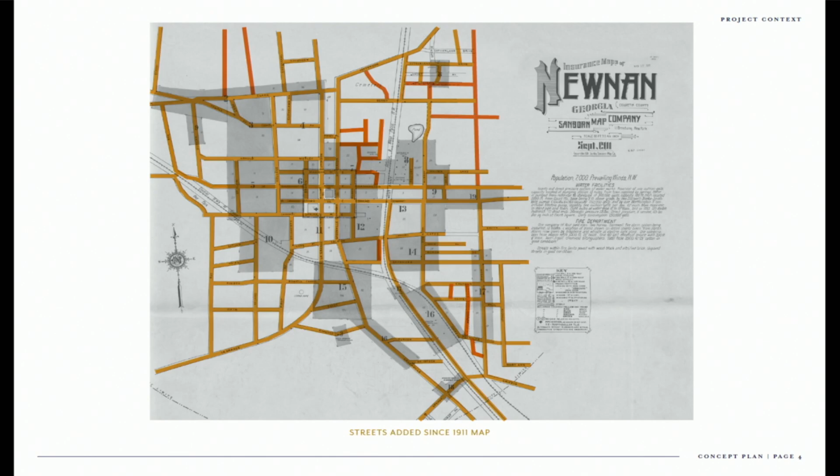Since then, we've only added a few small streets in this same district. So if I go back and forth, you can see the added darker orange color in these areas. And that's partly due to land becoming more available, or some industrial land that was then turned over to some residential streets and the like. But that growth happened in smaller block forms, as you can see, versus the larger blocks that were there previously.

So why are smaller blocks better? Why are streets good for cities? We went over this with the public on the 18th of June. Streets and blocks create more efficient network for vehicles and pedestrians to move around. They give you more route options so that it helps to distribute traffic around town. There's more on-street parking. You all have a pattern of diagonal parking on your streets, which adds a lot of parking capability to your streets, taking that pressure off of the blocks in the private development.

And there's more access to private property, a very clear reason to have public right-of-way, which then creates value for that land. The more street frontage we have, the more front yards, the more front doors, and the more street fronts that we can have and provide to property owners, which means that there's more opportunity to create development, whether that's an ice cream shop or a hair salon or whatnot. Those are all great benefits to the city.

And all of this results in what I think the goal is for you as council members, is to create a place of density, a city that feels like it's got a strong identity, and reducing the amount of sprawl outside of the city limits.

Part of our research involved looking back through some of your past documents, planning documents. One that resonated a lot with us was this report from 2014, which was the Livable Centers Initiative report. This was won by a grant by the city, and this planning group came in and did this whole analysis and then created a vision plan for the city, specifically focused in the area encircled in that kind of gray dotted line. So essentially, the core of downtown, the 9-block square, and to the east. Knowing we all know that to the west is a pretty substantial single-family fabric and pretty intact.

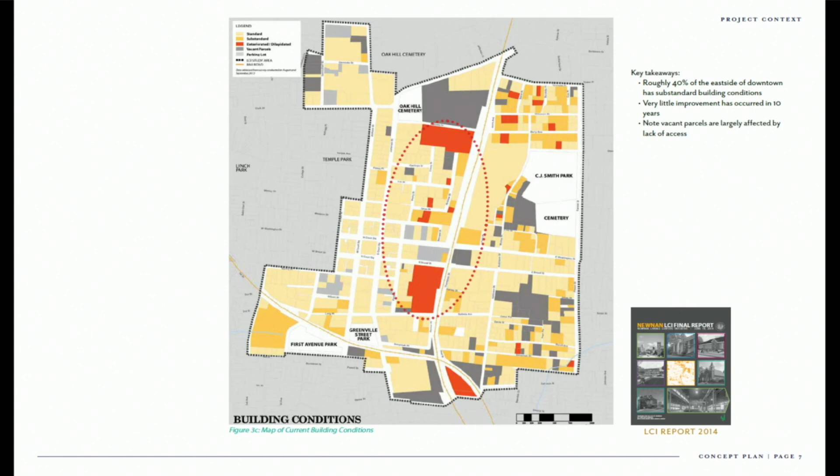Going back from 2014 to today, it's not a whole lot different, although we do know there are two new owners now for those large red parcels.

Similarly, pedestrian facilities, specifically sidewalks, are almost non-existent on the eastern side, definitely in our district. Those red lines are non-existent sidewalks, and the blue are sidewalks that are sufficient. So all the more important to create connected streets so that we can create connected sidewalks leading to downtown.

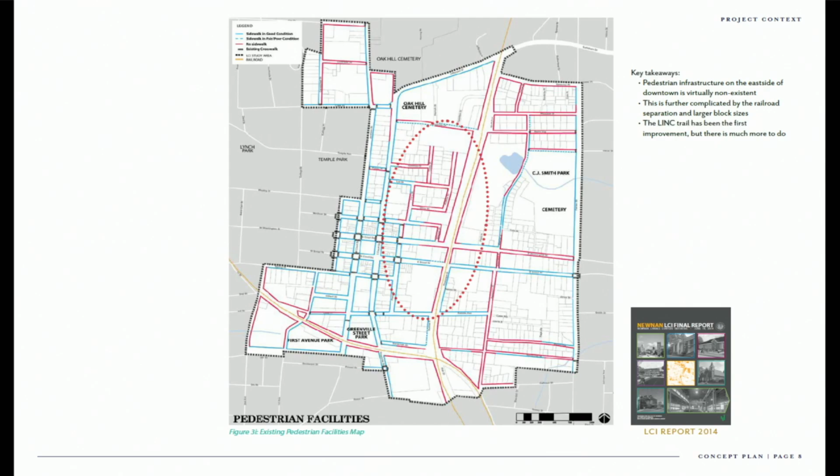Owner-occupied homes. We can look at this and see there is quite a lack of residential in the downtown east area. In 2014, it probably doesn't look a whole lot different today, although we know what's not showing up here is some apartments above retail in the core downtown area. But what we can learn is that there's kind of a mix of owner and for-rent properties on the east side.

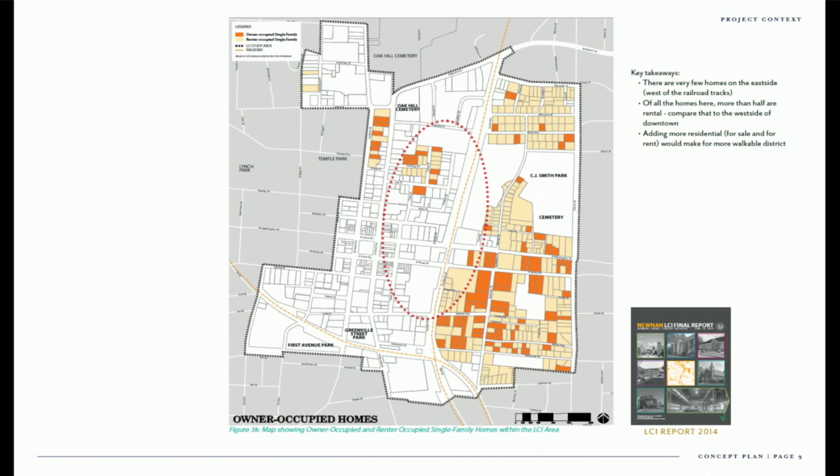The owner being the orange, for rent being the gold. The goal we see as part of this study is how do we increase more residential in this district, specifically in the area we're talking about.

Part of the summary of that document was this slide, which brings solutions to all of those scenarios that were portrayed. Let's see if I can do this pointer... All right, the pointer's not working.

You can see there is a suggestion that Andrew Street become an extension, that T4 north-south connection in two points is a big part of the Andrew Street initiative. The restoration of the mill into some readaptive use is part of that.

And then coming on down to 57 East Broad Street, obviously that whole parcel is looking for a redefinition of what that use could be. Clearly an initiative that's part of your purchase of that land and what we're doing moving forward.

Another suggestion as part of this was the LINC trail that runs north-south along the tracks on the west side, which is along Andrew Street. So essentially this becomes the framework for what we're doing here today.

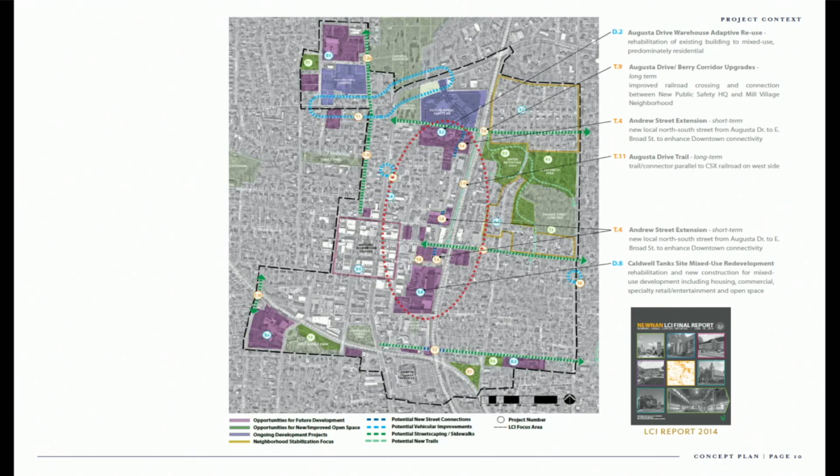Any questions on that summary of the report? Anyone?

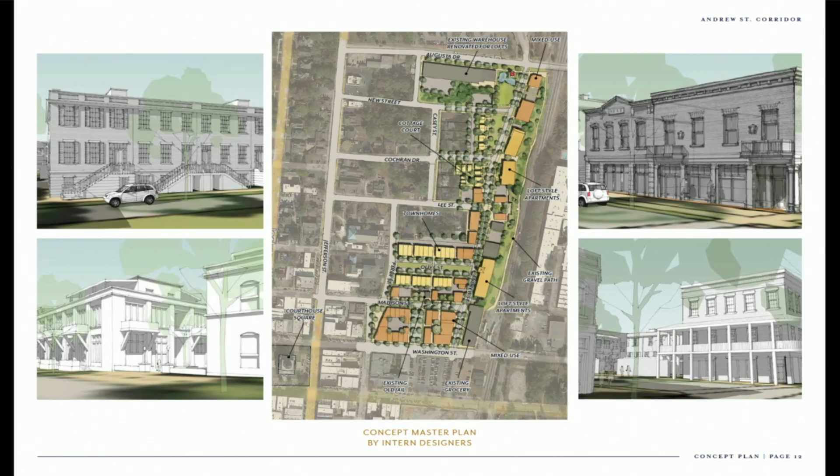Great, so we'll dive into Andrew Street, our process with that property to date. We all know that the seed of this idea most recently came about a year ago when we partnered with your city staff to create a vision for the Andrew Street corridor with some design interns working in our office. I think it was well received, and that's why we were asked to come back and look at this with a more critical eye moving forward.

As part of our kickoff and understanding phase for this scope, we held a public meeting on June 18th. This is some summary photos and documentation of what we heard that evening. We had roughly 50 to 55 people attend—business owners, homeowners that lived in the area, and people from elsewhere around town. We thought it was a very good outcome.

We did a presentation very similar to this, starting off, and then broke into smaller groups so we could have more intimate conversation and a question and answer session with the residents. We asked some questions about what they would like to see here, and we also had three image boards printed out, a collection of photographs as a way to cast a vote of what made sense or looked good to them, and how that could be applied to the Andrew Street corridor.

It was a big cross-section of imagery. We have some slides of that next, but this slide summarizes the outcome of that.

So the vision statement we've crafted, based on language we got from written documents but also verbal conversation during the table time, is that the end result should be a dynamic neighborhood blending together different uses, building styles, and people groups. Green spaces and safe pedestrian and bike infrastructure should be integral and welcoming.

We heard a lot of words used to describe the vision for this place. Friendly, eclectic, and accessible were repeated words during that evening's discussion.

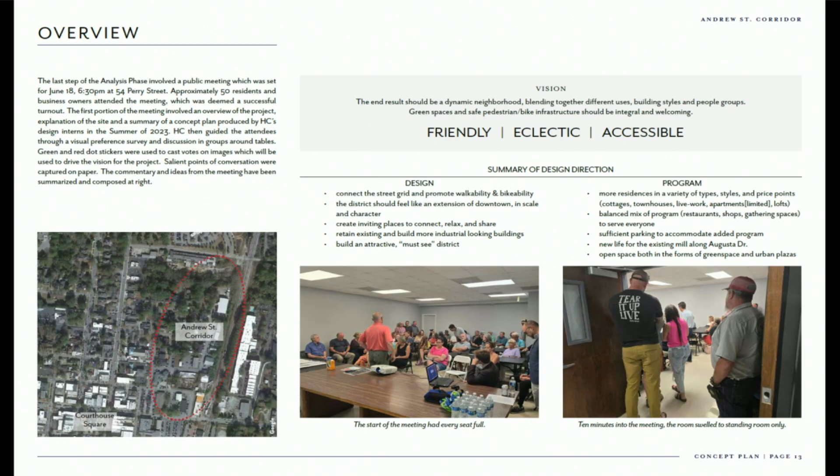And from a design aspect, there was a lot of conversation around connecting the street grid, and that the district should feel like an extension of downtown in both scale and character, to create inviting places that people can connect, relax, and share their lives in.

Retain existing buildings and assets throughout the property. There are some industrial buildings, the old mill, the water tower - all of that lends to the uniqueness of this district. A lot of people wanted to see that stay, and also inform the new structures.

And then build an attractive, must-see district. People saw this as a place to draw people who may be different from downtown or other parts of town - something that doesn't exist today.

The program varied, but it did resonate with a lot of people to see housing of all types. People wanted to see people of all types living here, including for sale and for rent, and they liked things that looked like cottages and things that looked like townhouses. We've got a more detailed summary of that in the next slide.

So, a balanced mix of shops, restaurants, and gathering spaces. Sufficient parking was of concern - as we add these new uses, we want to make sure we have sufficient parking. New life for the mill along Augusta Drive was important, and open spaces, both green and urban plaza or hardscape spaces.

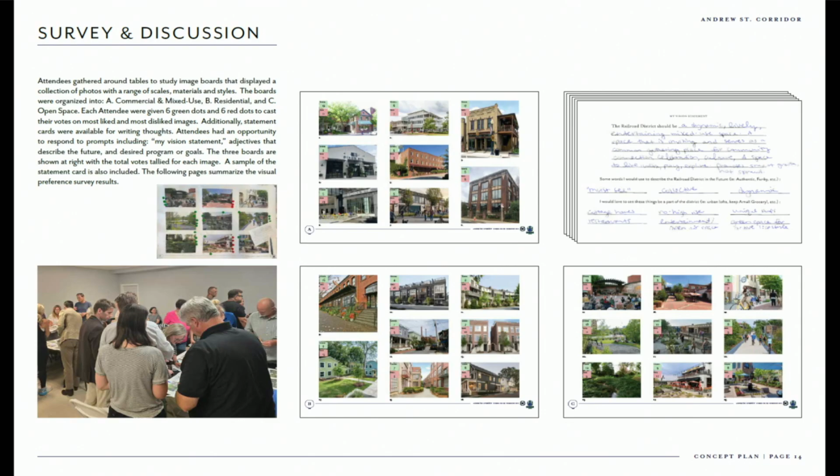We also created this form on the top right that prompted a few questions and had people write down comments, which led to the vision statement and some of the other words you saw on the previous slide.

Brick was a big part of it. The scale of buildings being one, two, and maybe three stories seemed to get the most responses.

Any questions on the summary of our public session?

Quick question for you on the themes representing these images: the second one says buildings of an industrial and more vernacular character. What do you mean by vernacular character? Do you want to speak to that?

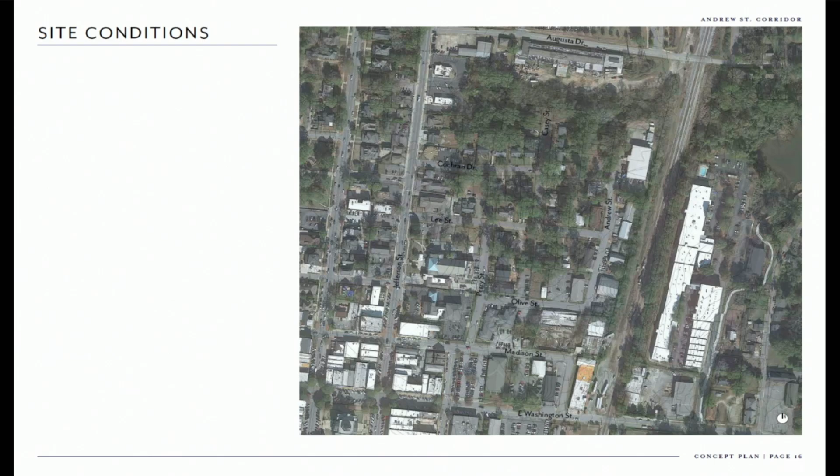So we had to take time and explain that that was just a vision. When we came back to our tables and started designing, the first thing we did was say, let's more closely evaluate the land that we're dealing with here.

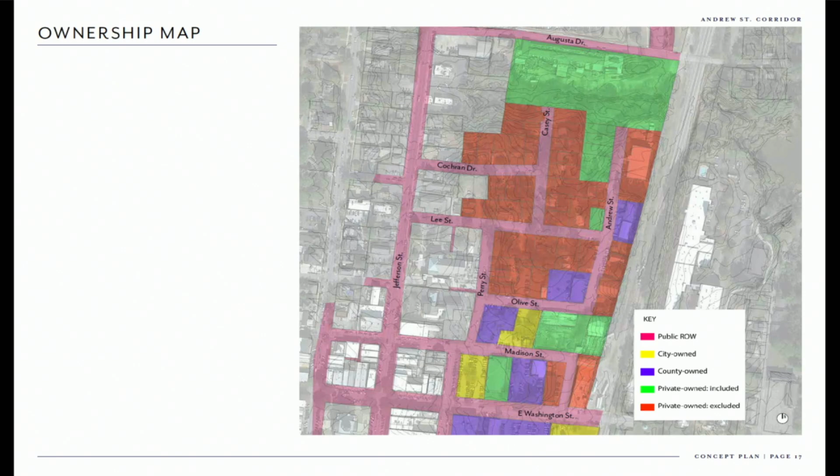In red, we are not drawing over or designing for any of the land that's either a functioning business today or a home that's occupied. So that was the first course of action following the public meeting for us.

Then we went back to the drawing board, starting with the primary mission here: to create Andrew Street as a connected street from Augusta Drive down to Washington. So that's what this slide depicts.

What's the typical right-of-way width right now on Andrew? On Andrew Street, it is 50 feet. Some of the east-west streets are 60, I believe. Within this district, for the most part, they are all 50-foot right-of-ways, like Cochran, Casey Street, and Lee Street. Once you get down more towards Madison and Washington and into the downtown blocks, they're a lot wider, maybe 80 feet.

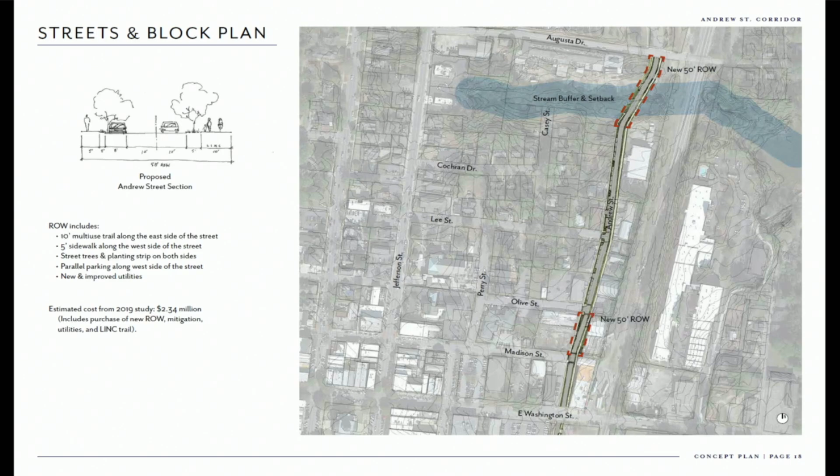The 2 feet is just grass, and then behind that, a parking lane, and then there will be bulb-outs every, say, 4 cars. You'll have a bulb-out, 8-foot wide by usually 10 or 12 foot long, that a tree is planted in. That was, again, in order for us to fit all this into a 50-foot right-of-way - that was the best scenario we found to make that work.

The 2-foot grass strip allows you to open a car door without hitting somebody walking on the sidewalk, so that's a pretty critical dimension as well. In order to get trees on both sides of the street, we included those bulb-outs every so many car lengths. Yeah, I mean, that makes sense.

I see that on the southbound side, then 5 foot on the right side, the northbound side - that's again kind of impractical in reality to get a large tree growing there. 5 is fairly common in urban districts, I will say, but ideally if you talk to a landscape architect, they're going to want more. It's proven that 5 can work, especially if it's a linear strip versus a square tree pit.

Any other questions on the right-of-way before we move to the plan? Great. So this is our current proposed vision plan for you all based on the data to date. We're looking at properties assumed to be part of this process, including city, county, and willing private property owners, leaving those that own private land - whether businesses or residences - to choose at some point whether they want to redevelop their parcel or sell. So we're intentionally not drawing over or designing for those parcels.

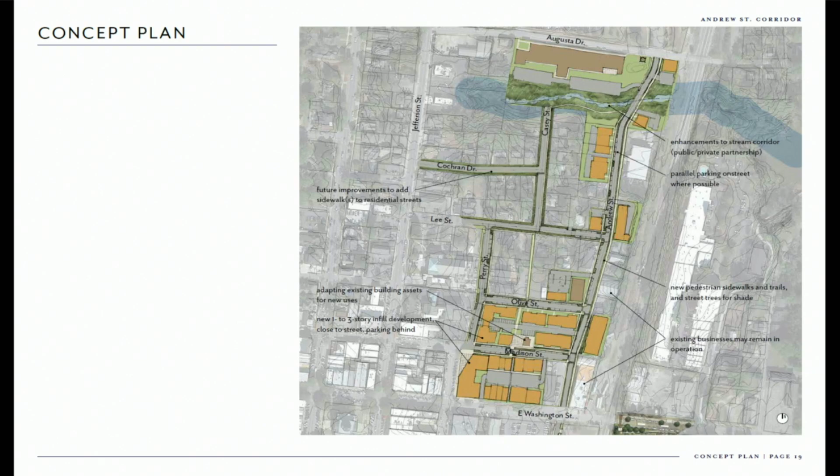Am I reading that correctly, that you're looking at a pedestrian connection also between Lee and Olive? So we're making a suggestion there. Lee and Olive, this is where Councilwoman was discussing.

These are all private properties. There is a shared property line in this alignment, as a way to create better connectivity for pedestrians from this portion of the district to the south, and then potentially to a reuse of the jail, and then potentially down to 57 East Broad. There could be an easement, perhaps partially shared on the backs of those properties, to provide a pedestrian connection through that block. That is a suggestion, not a requirement by any means.

One of the reasons we suggested it is because it helps reduce the size of the block and make pedestrian connectivity a little less cumbersome. Going back to our earlier conversation about the benefit of smaller blocks, they don't have to all be defined by streets. They could be defined by pedestrian connections as well. So ideally we'd like to see maybe an inter-block connection all the way through here, but that is just a suggestion.

Now I've got a couple more questions about that. Is that residential through there, or is it industrial through that area? That's facing Perry Street, I believe, mostly office use there. There's two residences there.

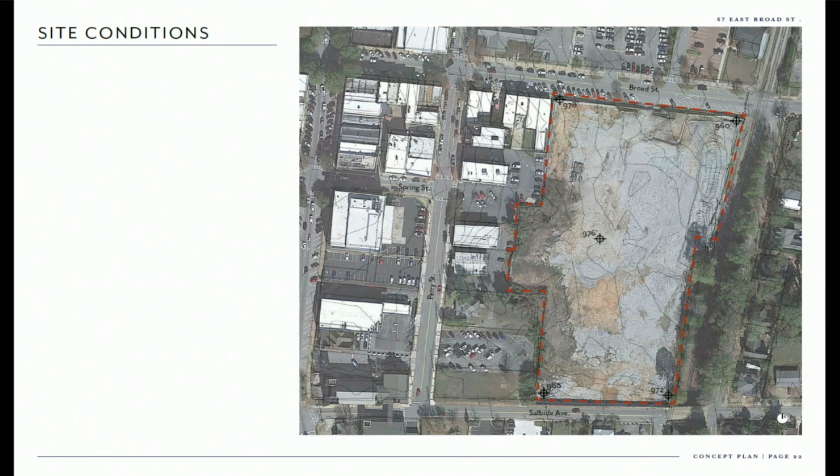So why are we talking about that right now, when I thought this engagement was just about what the city owns? Correct, the design concept is only looking at this site, but we do want to think about how any public right-of-ways would fit into the existing street grid. So that's where we got to that diagram study.

So Spring Street right here, you can see how that can extend into the parcel. And that actually works pretty easily from a grade standpoint. So this is the city block we use, and we kind of stamp that down over this property. And if you extended that length here, you could see there potentially could be another street somewhere in here.

So that's what you're seeing here in this diagram. This was an extension of what we did as a concept, almost a collage, 2 years ago, just to show what extending that grid would look like. That means purchasing a right-of-way here and a right-of-way here to make that work.

Internally, we said, well, that's probably not as viable, so let's look at a scenario where we're not purchasing an additional right-of-way here. We do think this one is critical. Extending Spring Street is pretty important in our minds to creating a better street framework in the district, no matter what scenario you looked at here.

So we essentially went from the most investment in right-of-way and street infrastructure to the least, and looked at the metrics of what that gave you. You can see here linear footage of right-of-way, and then what the yield would be in linear footage of street frontage, essentially the amount of front doors on those streets. If you look at this top red number and the bottom green number across these four, you can see how those jump pretty quickly, from over 2,000 to just over 1,000 linear footage of right-of-way investment, and conversely what that gives you in developable acreage or linear footage along the streets.

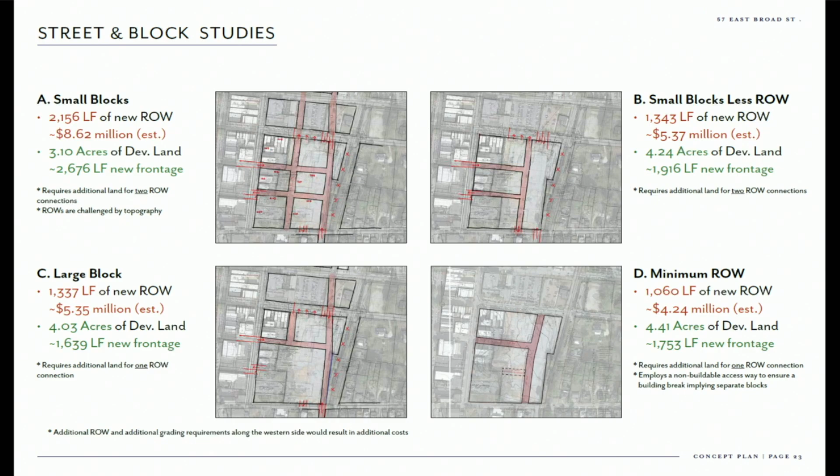So what we deduced from our analysis is this is a lot more investment because we have to purchase two more pieces of land to get those right-of-ways, and it's a lot of investment in right-of-way. Additionally, even though there's a lot of frontage created here, some of these blocks are not the most efficient for contemporary program, construction, and parking needs today. So we felt like somewhere in this area was the better place to be, given the amount of infrastructure invested and the amount of land created by building these streets. This last one we felt didn't give us quite enough definition in the blocks.

Any other questions on that before I move to the preferred?

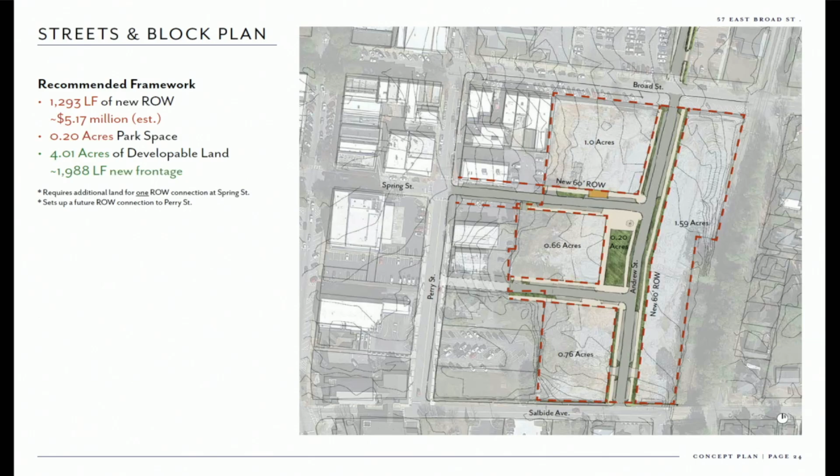Where we needed, it was working out the best to have Andrew Street continue where it was, and to then have another block, mid-block connection, or another street between Andrew and Perry going north, really shrunk the size of those first 2 blocks, and it was starting to be restrictive to some of the proposed program. Gotcha. So let's jump to that so we can see how this could develop based on proposed right-of-way.

So we know that there is an interested party that may do a hotel here of 125 keys. So we've located that on the northernmost block here in proximity to Broad Street and with some frontage on the new green space. And it's also next to what we propose to be the location for a parking deck here that would be a city parking deck of 4 levels.

So there could be some shared parking usage there between the hotel, which would have a high parking need, and the rest of the development in this area. The parking deck would serve as a good buffer to the rail noise, so that was the reason for locating that there. Hotel makes a lot of sense being closest to downtown and visible along Broad Street, a fairly heavily trafficked corridor.

And then the remainder of the buildings are less defined. They can be commercial, they could be office, they could be residential. We've done a little key diagram down in the bottom left of what the potential ground floor use could be. So in red, these could be ideal locations for commercial operations, whether it's a restaurant, a coffee shop, whatnot. And then the blue could be either an office or some sort of meeting space. We do see a lot of uses up on the second floor being that kind of use.

And if it's a 3-story building, maybe even the next story up. The yellow in this would be different forms of residential, again, noting the need for residential in this district. This is a hypothetical program that could be yielded from this plan that you see here. Based on our professional experience, and using parking as a limiter, using square footage and building sizes as a limiter for that.

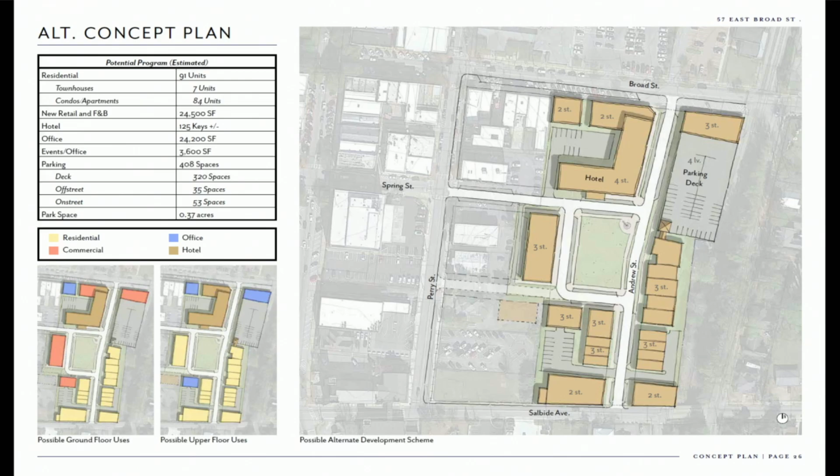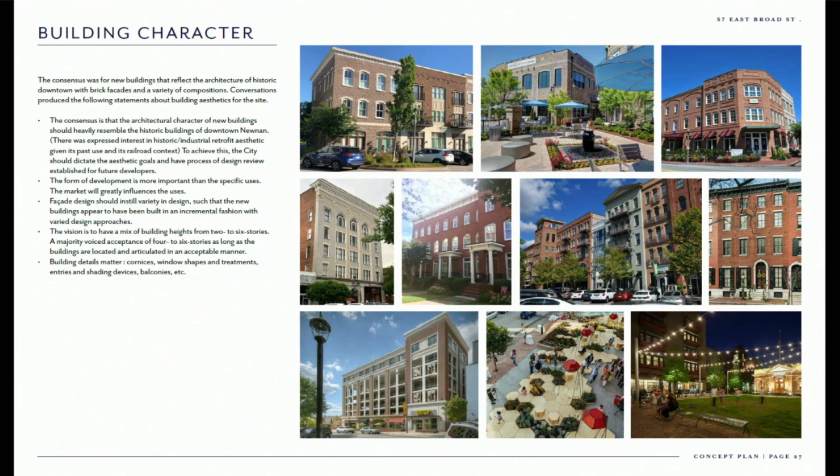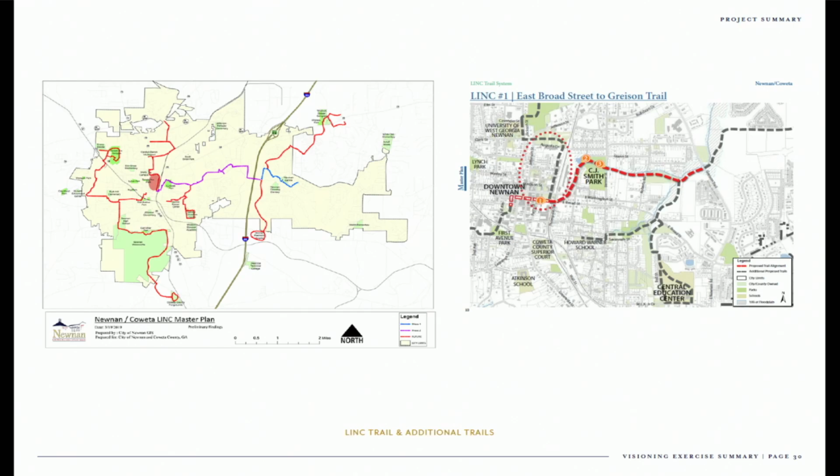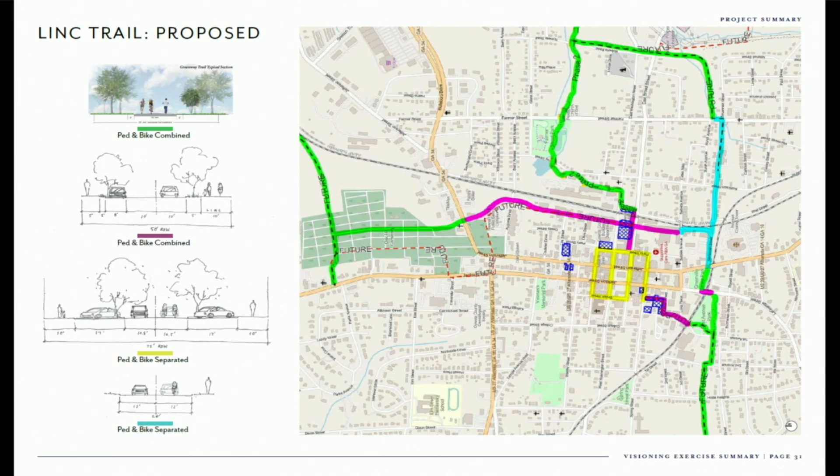And then what that looks like for the trails map for the LINC trail. We do propose, at a high level, that there be an intersection placed here—a stoplight at the end of Andrew, which is the boulevard there now—so that the LINC trail can come across. At this point it's much safer than coming through this section here.

Ryan, could you step on to next steps, please? Yes sir, thank you. Next step.

Feedback we will take from you all tonight—we welcome email conversation, or if you want to communicate through the city manager's office to us, any input you have to influence the evolution of the plans you saw tonight. We will create from that what we call a vision book, highly graphic, with plan diagrams, photographs, and three-dimensional drawings to help portray this vision to potential partners in the 57 East Broad Street parcel.

We will also create a technical guide called the Master Streets Plan, where we put all this in CAD for your staff to help implement those streets and right-of-ways. And then we're also going to create a phasing and implementation guide, where we give insights on development controls, zoning recommendations, maybe some incentives to invite development, and architectural recommendations for building. We appreciate you being here.

Thank you. As I said, we've got a hard stop, I will make you understand—I pledge and promise the next time we have one of these work sessions, there will not be a hard stop at the end of it. We'll be able to go on until we get everything you need from us. No problem, I apologize for that this evening.

Thank you, but the project schedule you've got looks interesting. Yes, and I think it's aggressive, but that's what we need here at this point—not making mistakes, but moving forward.